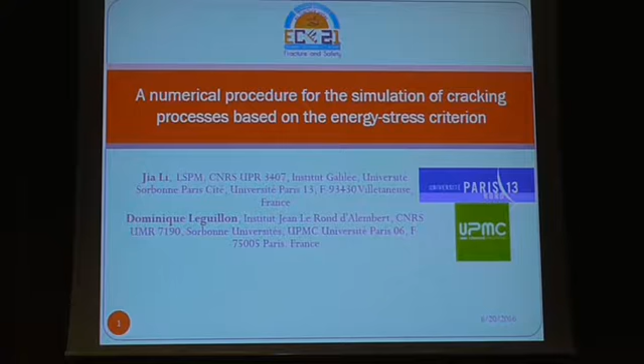As you know, we can predict the growth of macrocracks by using a suitable energy criteria such as the Griffith criterion. However, this criterion is not sufficient to predict crack initiation.

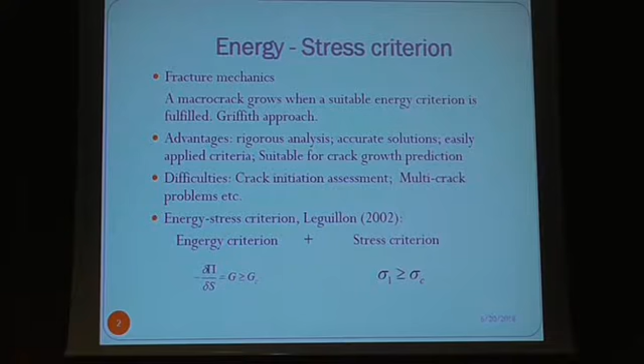In order to overcome this shortcoming, Leguillon has proposed the energy stress criterion that combines the energy criterion in fracture mechanics and the stress criterion in resistance of materials. They concluded that when fracture occurs, both criteria have to be fulfilled along the crack path. This criterion is physically reasonable.

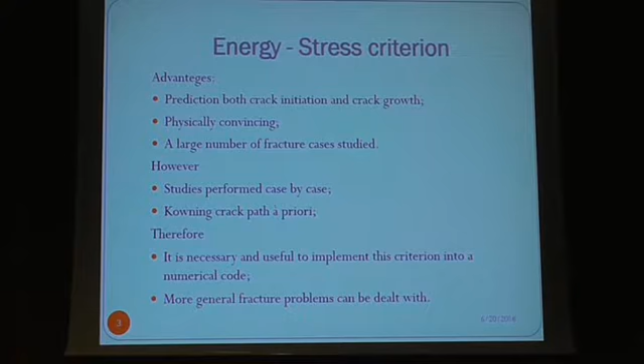So we believe it is necessary and useful to implement this criterion into a numerical tool so that we can consider more general fracture problems. That is the main motivation of this work.

In this work, we have implemented this criterion into a 2D finite element code. The main algorithm is as follows.

First, we localize the zones in which the stress criterion is fulfilled. For example, we have here 4 such zones. In each zone, we have one and only one local maximum of the maximum principal stress.

Then we try to draw the potential fracture paths in all these zones. Next, we can calculate the energy release rate GI for different crack path combinations, and we choose the maximum value of GI and compare this value to the material toughness.

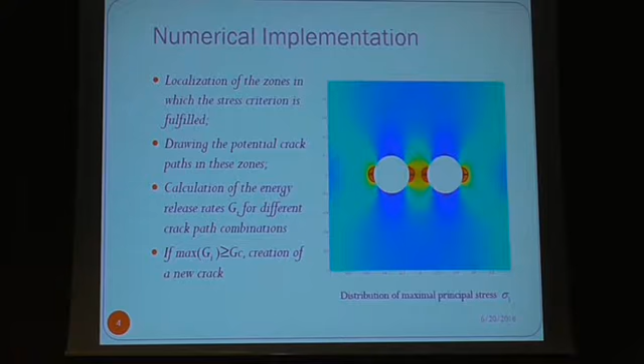If we have max GI larger than GC, we create a new crack. This is the main algorithm.

Now we explain some techniques used in this algorithm. First, we have to find all the zones in which the stress criterion is fulfilled, and in which we have a local maximum of sigma 1.

To this end, we use a technique named the watershed flooding technique. We explain this technique with a 1D example. First, we inverse the sign of sigma 1 and consider minus sigma 1.

By increasing the water level, we find the neighboring elements, and then we create the first catchment basin. By increasing the water level further, another distinguished local minimum is formed, from which we create the second catchment basin. And when the first and the second catchment basins meet, we place a dam.

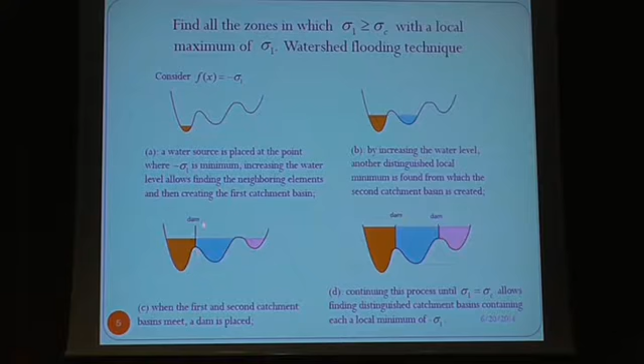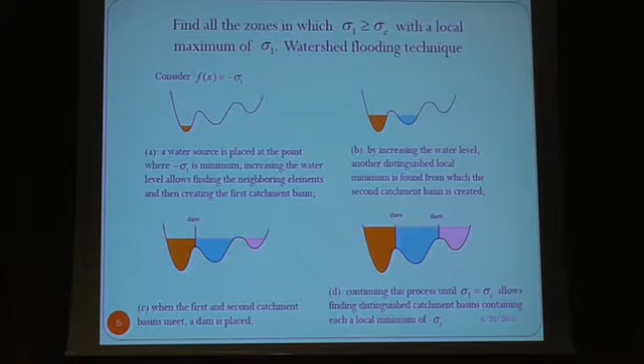This dam is the so-called watershed line. By continuing this process until sigma 1 equals sigma c, we can find all the distinguished catchment basins, each containing a local minimum of minus sigma 1. This is the technique to find all the zones in which the stress criterion is fulfilled.

This animation shows the watershed flooding process. We do find 4 distinguished zones, such zones.

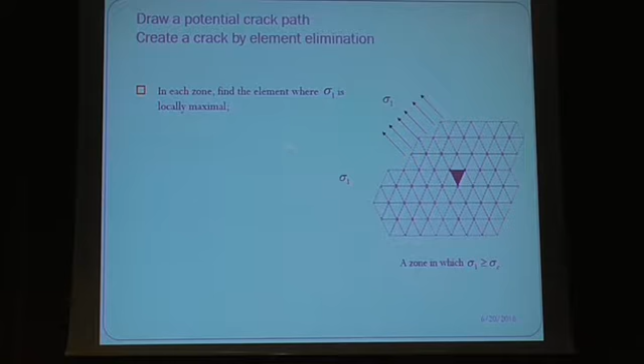Now we explain the technique to draw the potential crack path and how to create a crack by element elimination. First, in each zone, we find the element where sigma 1 is locally maximum. Then, from this element and perpendicular to the direction of sigma 1, we draw a small line of length dl using this simple formula.

And thus we can draw successively in the 2 directions the small lines to determine the crack path in this zone. To create a new crack, we just remove the elements where the crack passes through. Of course, we can use other more elaborate techniques to create a new crack.

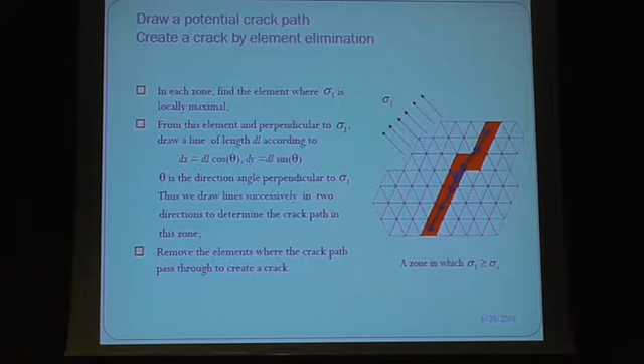Now we have a lot of potential cracks. Which cracks will be the real one? We assume that among all the potential cracks, the real crack will be the one making the maximum change of the total potential energy, the energy release rate. So we calculate the total potential energy before and after the activation of these cracks, and we calculate the energy release rate G, and choose the maximum value and compare it with the material toughness.

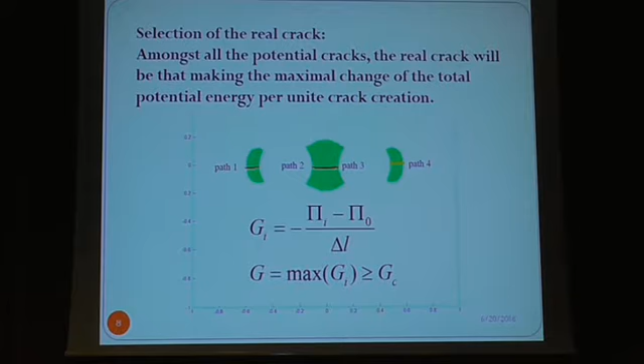If we have G larger than Gc, we create a new crack accordingly.

Now let's present some examples for the validation of this numerical tool. The first one is a plate with a central crack. We just present half of the structure, near the crack tip region.

The green zone represents the elements in which the stress criterion is fulfilled, the red zone represents the element to eliminate, and the black zone represents the field element that forms the crack.

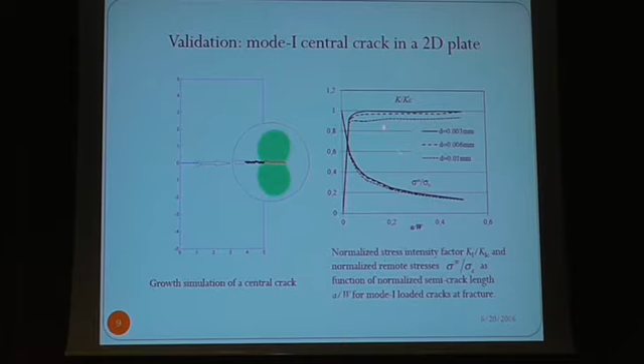We calculate the stress intensity factors for different crack lengths, and when we compare it with the Kc of the material, we can see that for long enough cracks, we have K over Kc equal to 1. That is to say, in this case, the energy stress criterion is equivalent to the linear Griffith criterion in fracture mechanics. The second example is a plate with two edge cracks.

The red lines are the paths obtained in the literature, considered as the theoretical prediction. This animation shows the crack progression obtained by using our numerical tool. You can see that they are really close to the theoretical one.

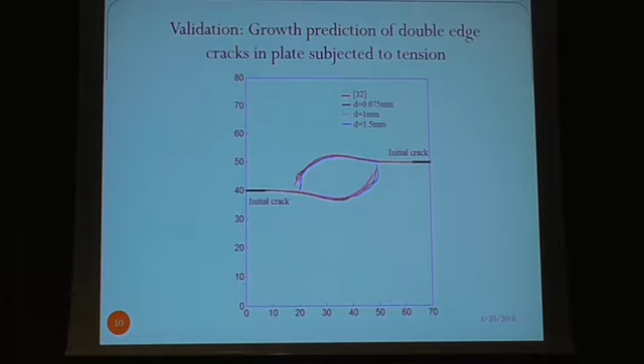In order to examine the mesh independency of the algorithm, we have used three different meshes with different element sizes. You can see that all the numerical results are very close to each other and very close to the theoretical prediction. This is the global response of the plate, the global stress-strain response, obtained with the three element meshes, and you can see that they are very close to each other.

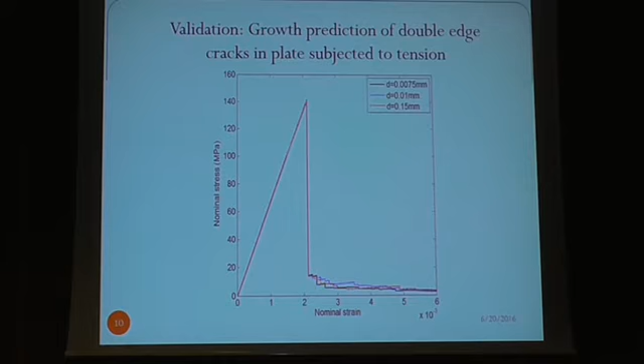Here we consider the next example: the cracking in fiber reinforced cross-ply laminates, studied experimentally by Parvizi. Here we have a tensile test on a cross-ply laminate. We have two outer plies with the fiber parallel to the tensile direction, and one inner ply with the fiber perpendicular to the tensile load. The onset of microcracks appears in the inner ply.

We can see from this figure that when the inner ply is thick, the stress criterion is predominating, while when the inner ply is thin, the energy criterion is predominating. The numerical result reproduces this transition well, and agrees very well with the Parvizi experimental results.

This is a crack path obtained with our numerical tool. Of course, these cracks appear one after another in a perfect systematic manner. This result agrees very well with the analytical analysis of Leguillon.

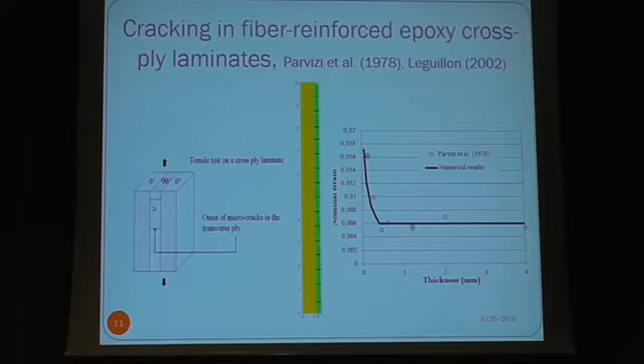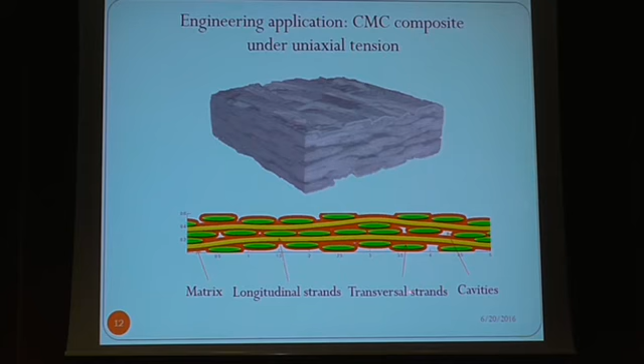The last example is an engineering application. We try to simulate a woven ceramic matrix composite in uniaxial tension. This is the simplified 2D element mesh, in which we have several materials: ceramic matrix in red, longitudinal strands in yellow, transverse strands in green, and also have cavities.

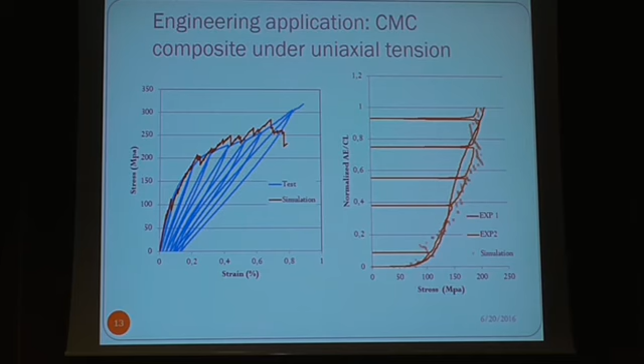We compare the stress-strain response obtained by the simulation and the experiments. Here they compare the acoustic emission measured in the experiments and the total crack length obtained in the numerical simulations. From these two figures, we can see that the numerical tool reproduces quite well the global response of the composite.

Conclusions. In this work, we have implemented the energy stress fracture criterion in a 2D finite element code, which can predict both crack initiation and crack growth. It can also deal with multi-cracking problems.

We have shown the mesh independency of the numerical model, because all the calculations are linear and have no convergence problem.

The future may involve the development of homogenized models, more operational numerical tools to address more complicated problems such as 3D, nonlinear cases, and so on. Thank you.